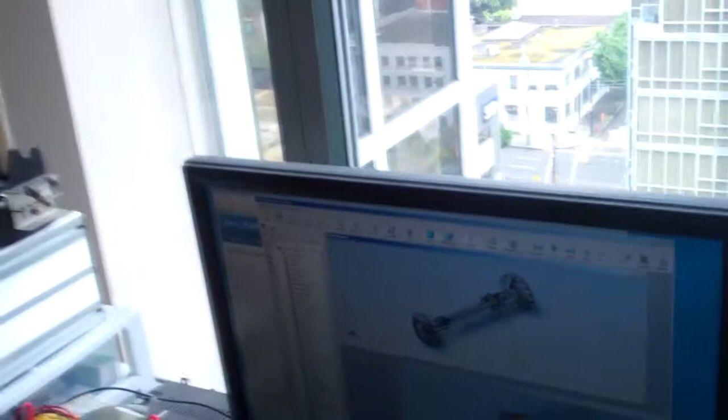So if you pan over here and take a look at the screen, this is our virtual rover. It exists in 3D model format. Major parts have to be made from carbon fiber, and this is our carbon fiber right here.

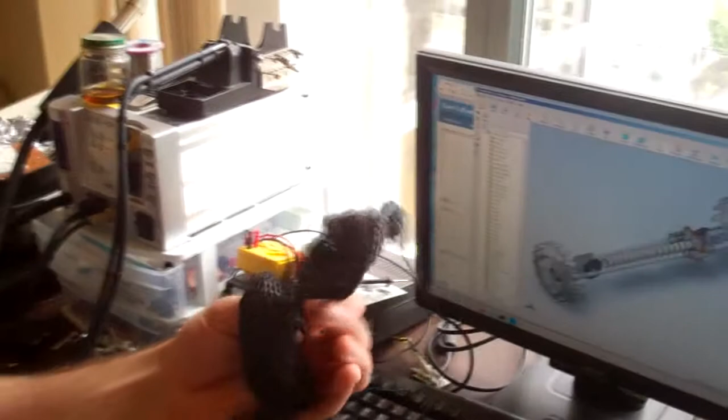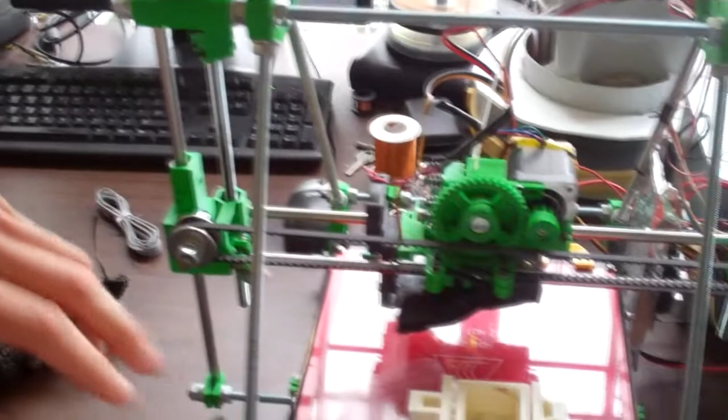What we're going to do is build the molds using this 3D printer, and the material we're using here is PVA, which is just glue. So this is the mold that we'll have, and we're going to put it around the carbon fiber, and as the solidifying agent we'll use epoxy.

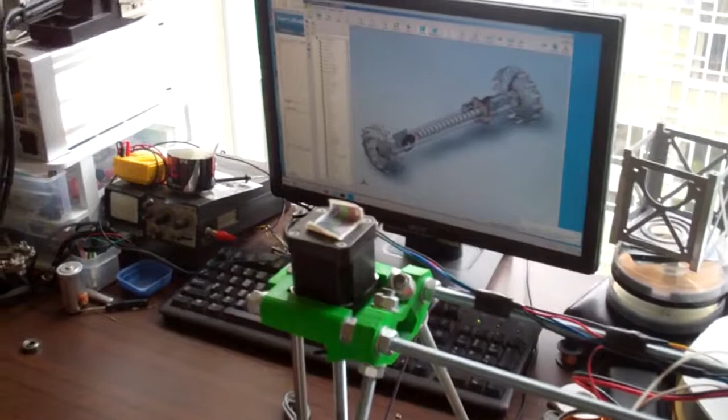So right now we're calling it virtual because we know that the time it takes to put all the carbon fiber parts together with the proper molds will take 45 days. So right now it's virtual.

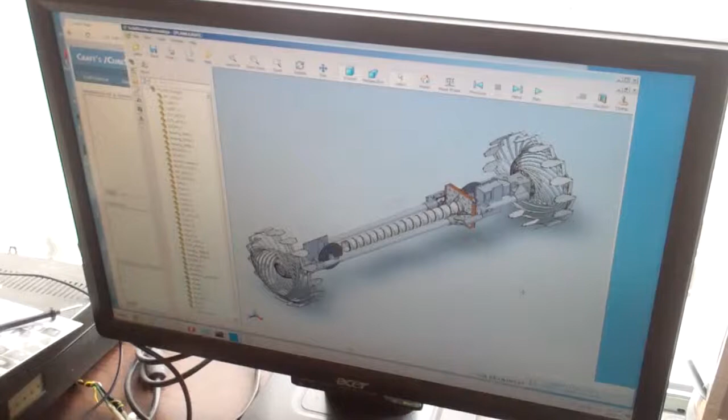The second configuration, if you pan back here, is our ground station. We're actually waiting for the parts to come in, so next week we'll be assembling it. We're not going to use the carbon fiber parts because it would be too expensive for our testing purposes right now.

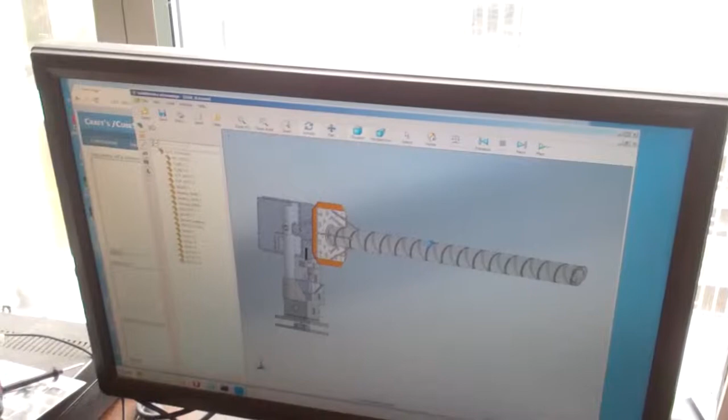So we're going to have this guy moving around on Earth. Our last configuration is the compact version of the rover. You see this is our Helix antenna. The purpose of this is we're going to use it as a software debugger to see if our communication is properly flowing with no errors.

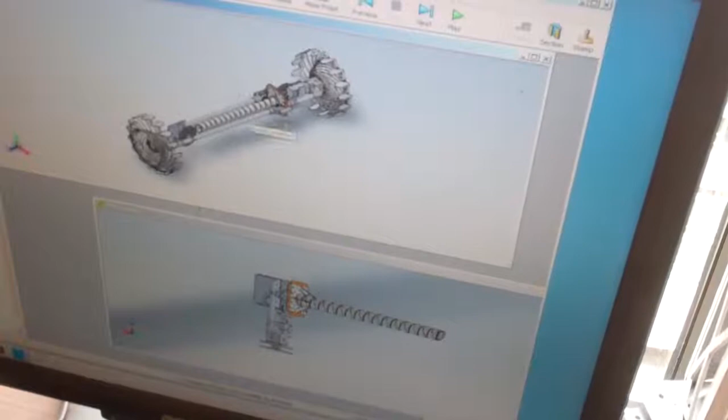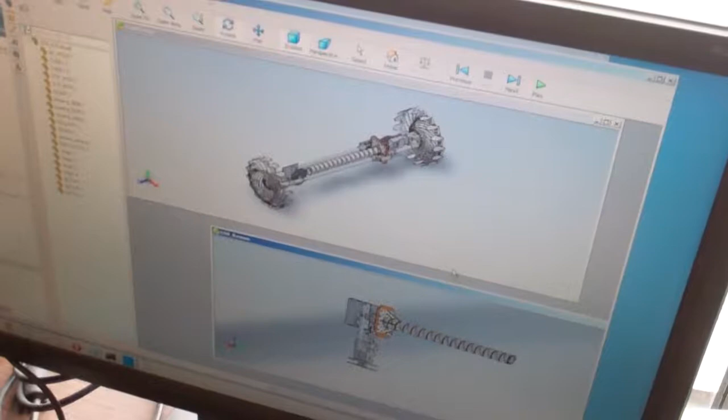One more thing about the compact rover and the ground station rover: this one has 4 stepper motors, and the compact version has only 2. One of our goals is to make proper software that could work for both, because eventually we'll use this ground station to find the flying target, which is our CubeSat. We'd like to build software that works for both configurations, the 4 stepper motor and the 2.

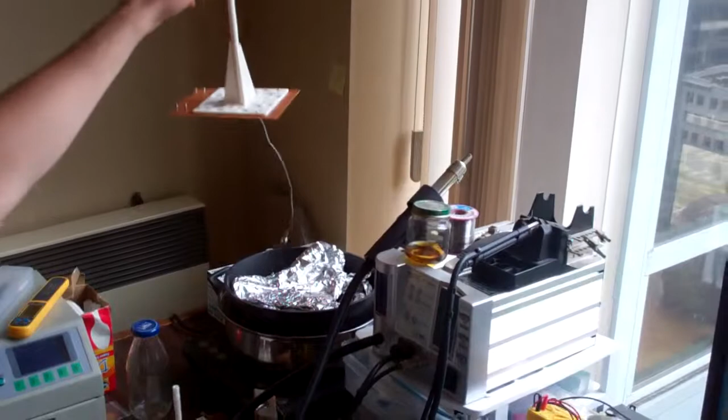Now we're going to talk about the manufacturing of the Helix antennas. This is our regular size Helix, which is what we're using for our communication. And we also have a 3D printed, smaller, reduced-size antenna.

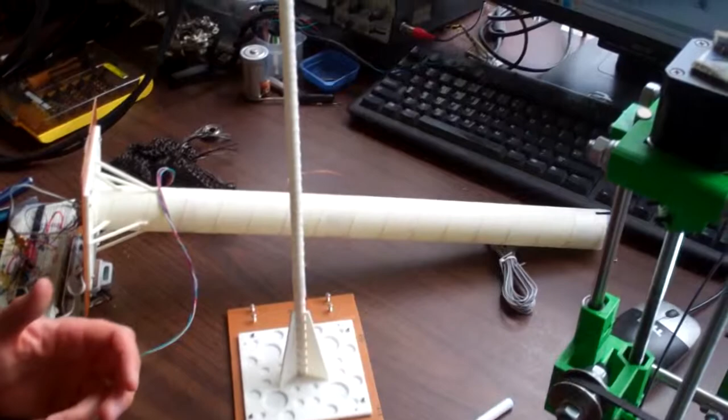The reduced size Helix has some major advantages. The 3D printing is twice less expensive than the regular Helix. Different winding of the conductors allows us to reduce interference between 2 transmitters working on the same frequency at the same time, which is important in the case of a constellation of CubeSats flying together.

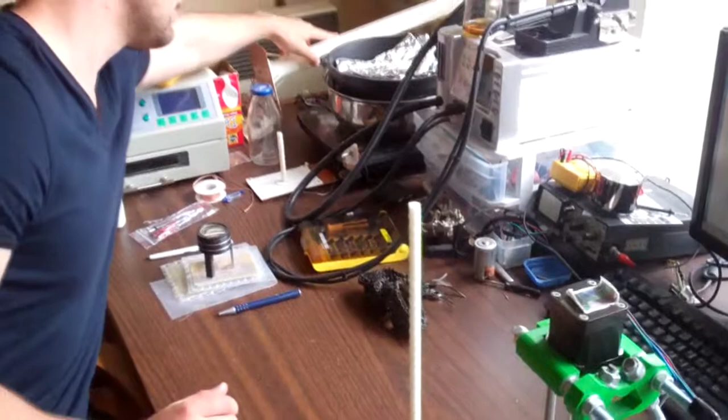Lastly, what we've done this past week is integrate the electronics with mission control, and this is the same electronics we use on our rover and our CubeSat.

Now the unique part about our mission control is that it's mobile. Well, it's on the web, but you could access it from anywhere in the world. And our ground stations can be positioned anywhere as well, because we've built our mission control through the web, through a server.